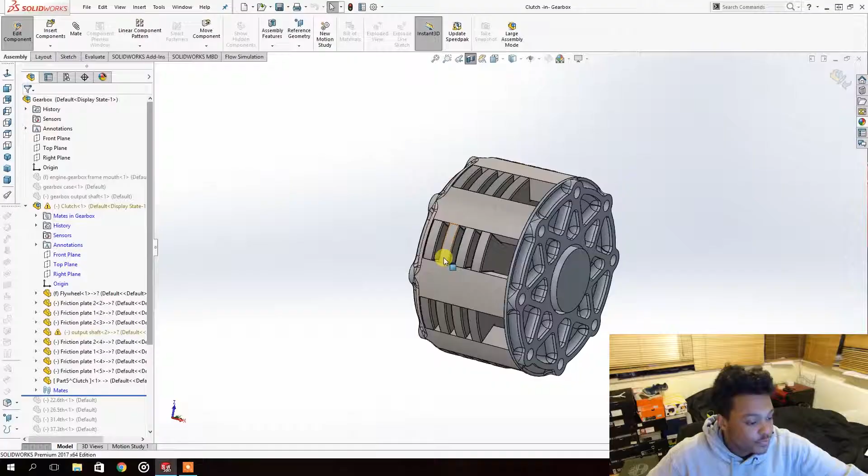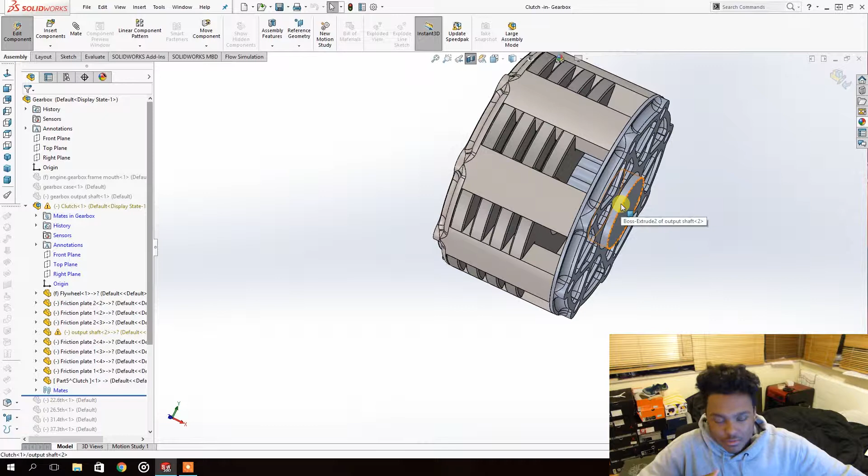The first thing the engine will be connected to for the gearbox will be the clutch. This may look like a double clutch, but this is a single multi-plate clutch. Single and multi are two opposite words, so that might sound strange, but it is a single clutch, there is just one flywheel attached to one output shaft, so only one output shaft. But there are multiple plates, multiple friction plates between the actual flywheel and the actual output shaft.

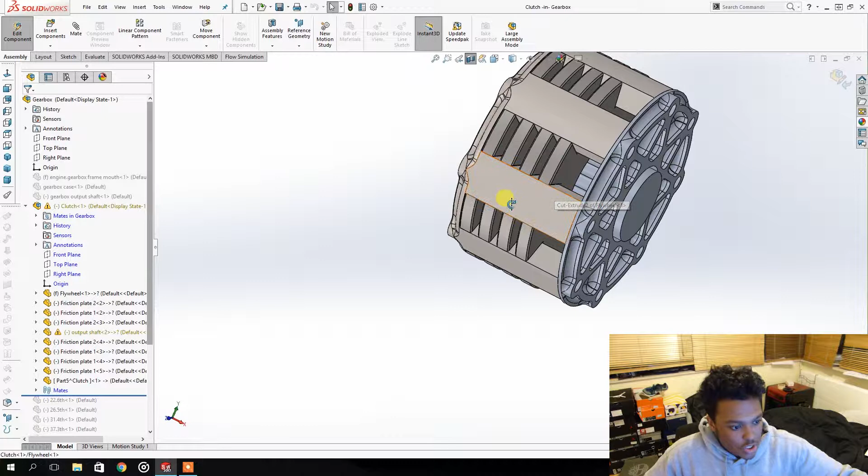The force is divided between those multiple plates to have a similar surface area, because this is only, I believe, 18 centimeters big. This is a very small clutch, so to still have this surface area you need to provide enough pressure between output shaft and engine flywheel to have a single drive line, instead of it slipping constantly, so you have to use a bunch of plates.

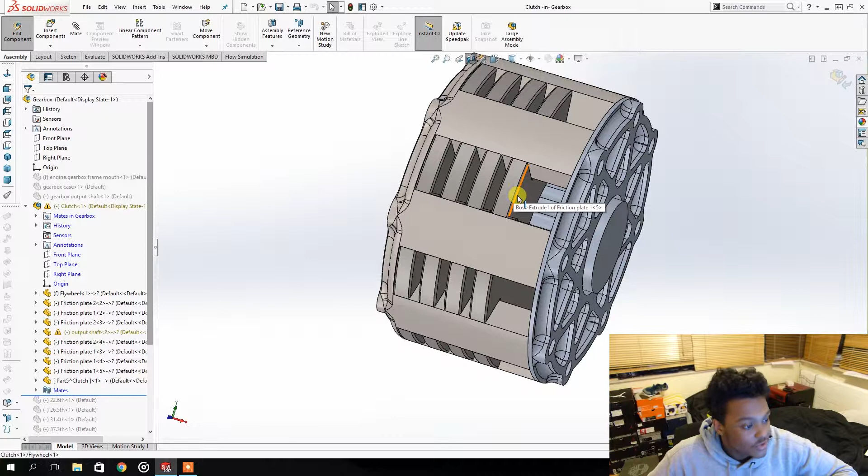So the way it works is there will be some sort of a pressure plate here. I haven't made that yet, and I still need to figure out how I will operate that, probably electronically, because I won't have a clutch pedal in the car or whatever, so that is something I still need to work out. But beside that, the way it works is pretty simple actually.

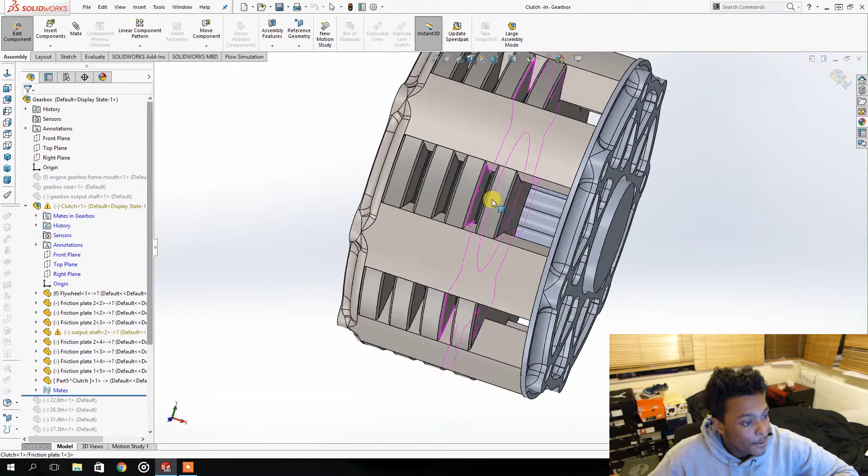If we take a section view like so, this will be bolted directly to the flywheel, directly to the crankshaft of the engine. So this will be spinning at a pretty high RPM, and also with a lot of horsepower connected to it, so a lot of force and torque and everything.

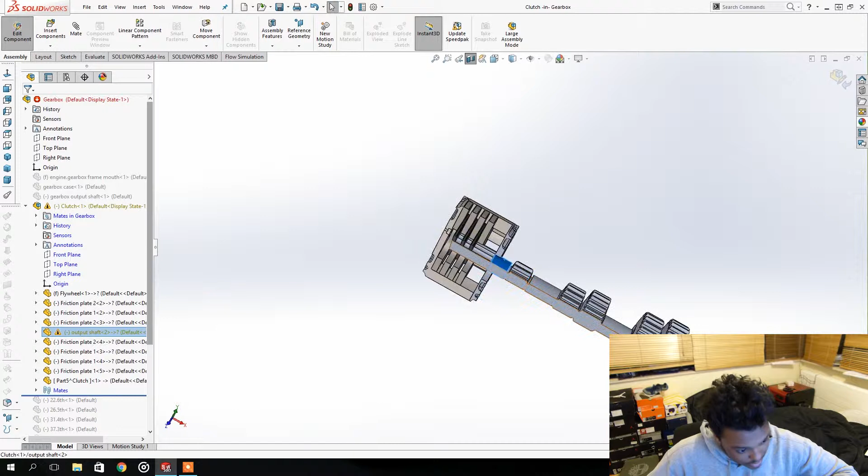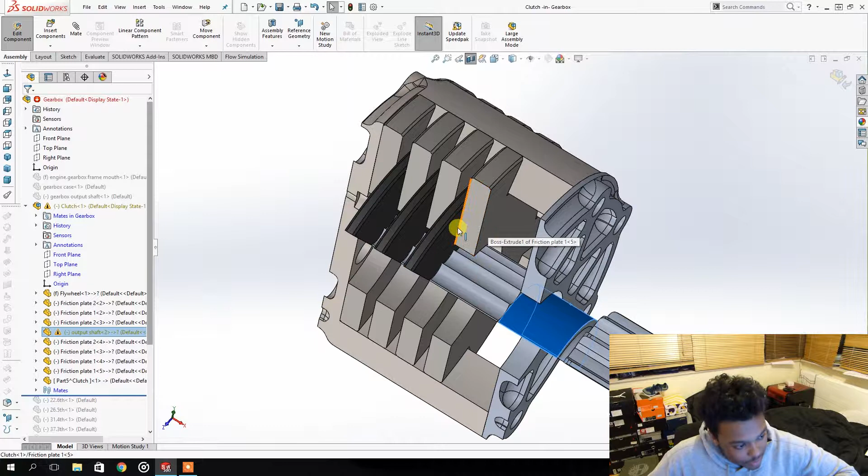This will be connected through the gearbox, and as you can see, the multiple gears, and also the differential, and eventually the wheel attached to the road. The way to transmit the rotational force of the engine to the wheels is through this clutch and through friction. This friction is created by applying a lot of pressure on this plate, and this plate will stick to this plate, and that will run through the whole system.

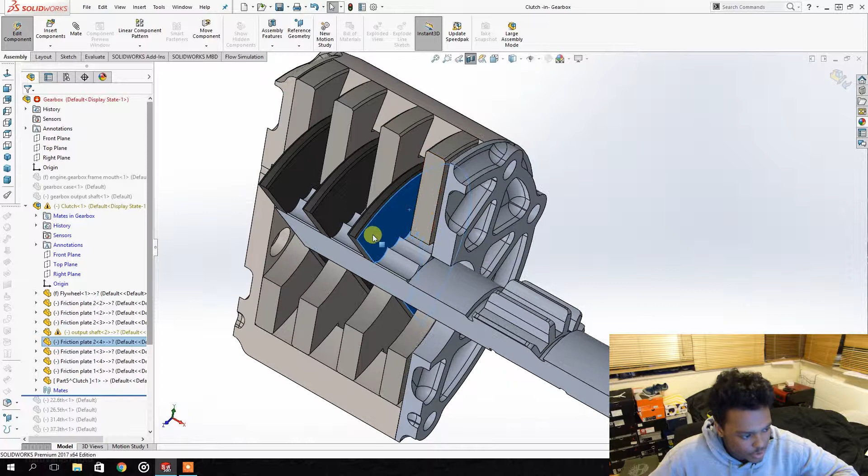Once you disengage the clutch when you're standing still, you can pull it back, and you will see that there won't be any contact between this friction plate and this one right here. These will be made out of different materials, some sort of carbon or steel, or just different fire retardant materials. This will be free to rotate, because it's not in contact with anything, so there won't be any friction created. So the flywheel will be able to rotate individually from the output shaft.

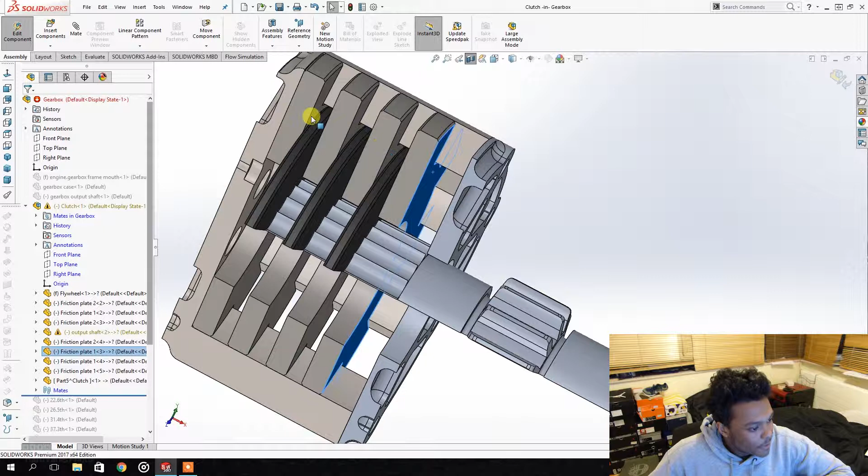As soon as you engage the clutch, you want to drive off the power of the engine, and you will need that rotational power. You can engage the clutch, apply a lot of pressure to this plate right here, and this will press down onto the rest of them, in this version, like so. With all of this pressure, this will have to move as a single unit.

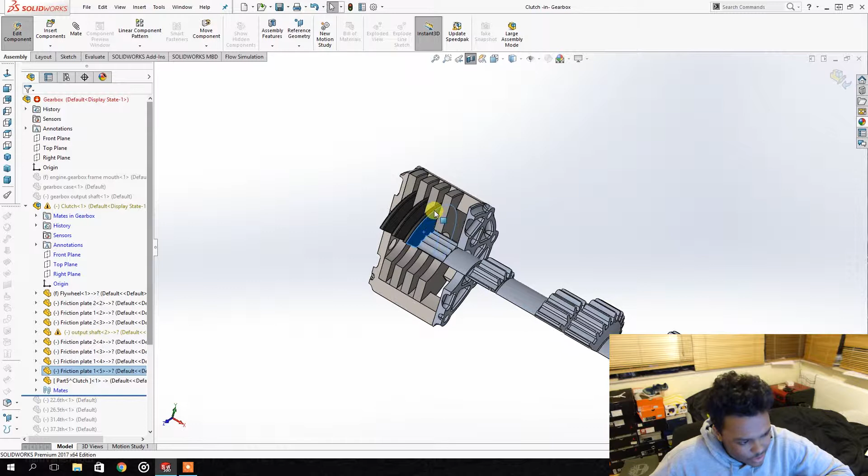Right now SolidWorks doesn't really know friction, so I will still be able to rotate it. But in the real world, all of that pressure and friction will make sure that it is moving as a single unit, and every single RPM from the engine will be directly translated into a single RPM from this output shaft right here. So that is basically the whole purpose of this clutch.

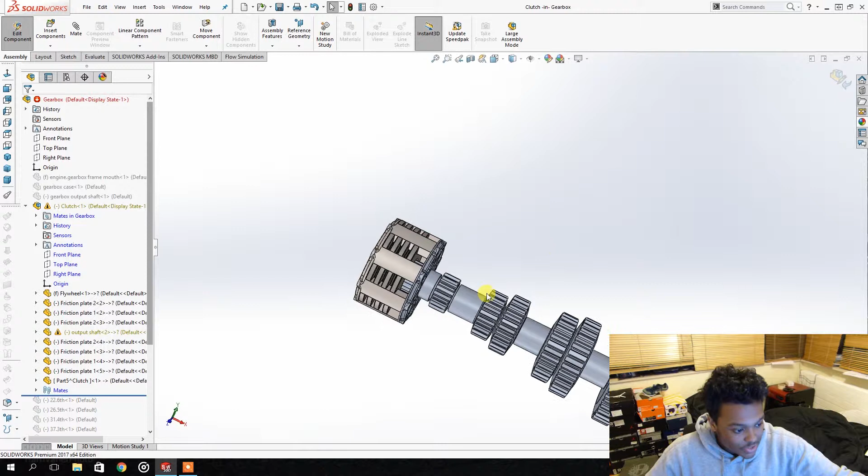Again, this will probably be a wet clutch, so this whole box will just be full of fluids and everything. This whole output shaft has 6 gears, and as you can see, there's a very small one right here, so that will be first gear, second gear, third, fourth, fifth, and of course sixth.

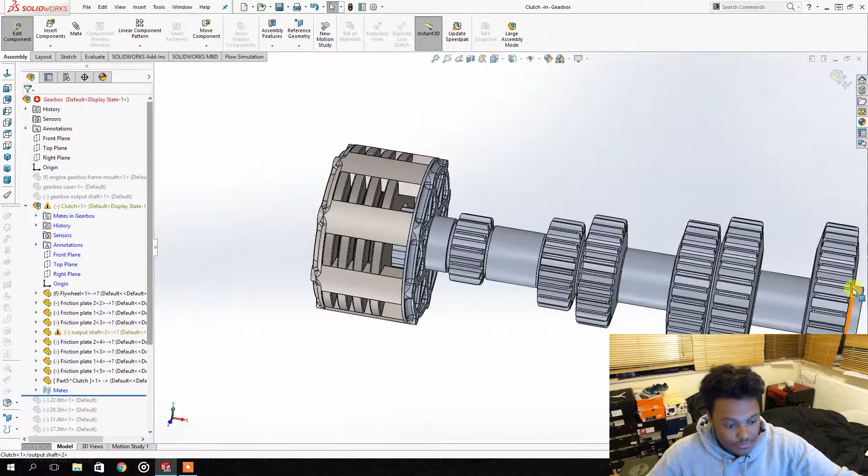One thing that might surprise you is there won't be a reverse gear on this car, and the reason why I will explain later on.

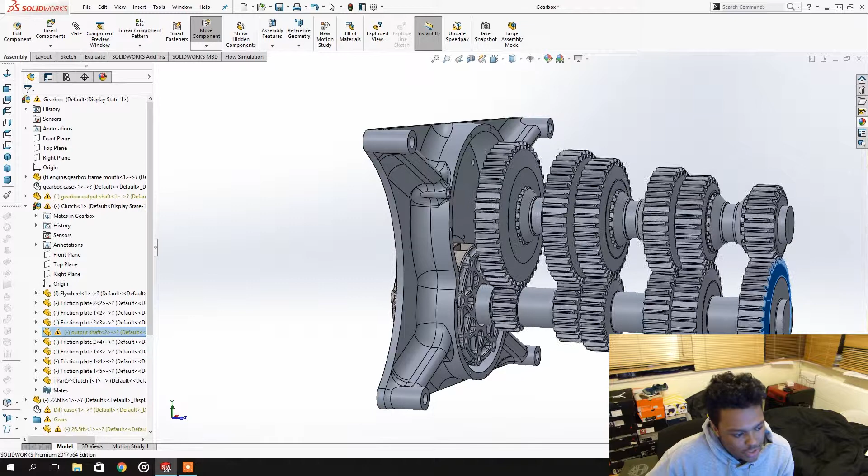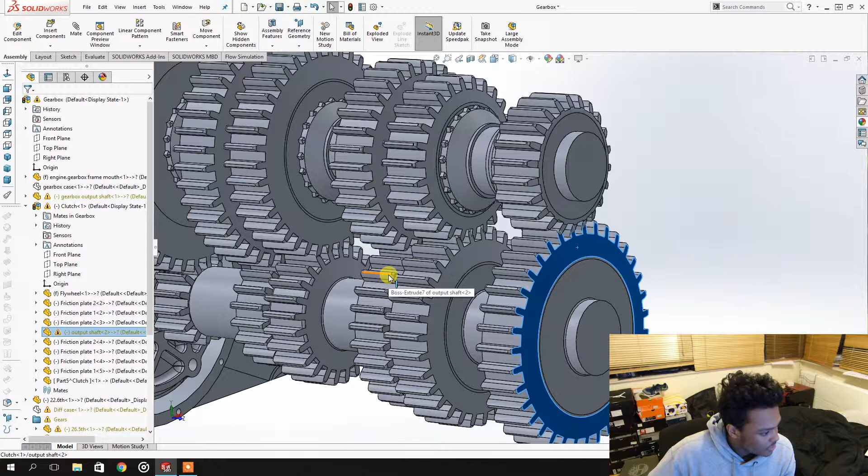So as you can see right now, we have all of the gears lined up against the output shaft with the corresponding gears on that. So when I start to turn this, let's say the engine is turning and clutch is engaged, but no gears are selected at this point. You can see that they all have been lined up, and they're kind of moving. Even though this isn't really how it should be, it is rotating with the ratio, differentials and everything, so that it's going good, even though the teeth aren't lining up in multiple places. I should really redo that just to make it look good, but for now the purpose is clearly shown.

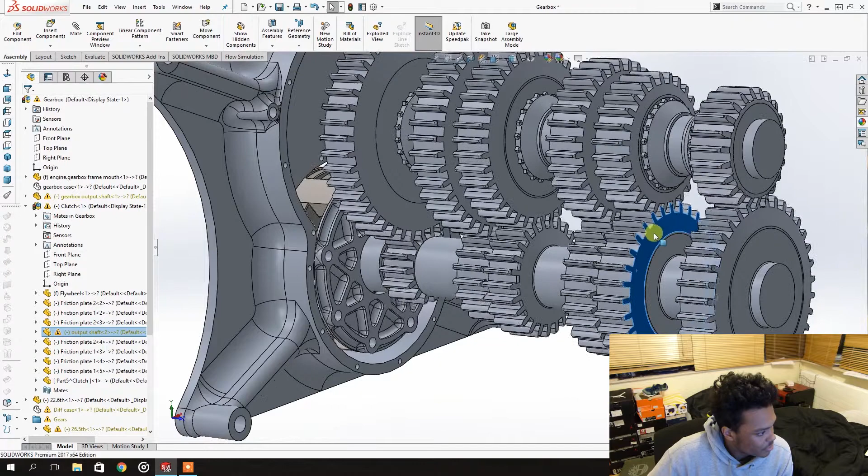But if you can see what I'm doing right here, I can just turn this wheel, the 6th gear right here, and you can see that one single rotation from the 6th gear will cause the output gear, the smaller gear on the 6th gear, to rotate way more rotations. So this is what you call an overdrive gear. One rotation from this gear might be even 2 rotations from this gear. I don't really remember the ratios that I used, but it's an overdrive.

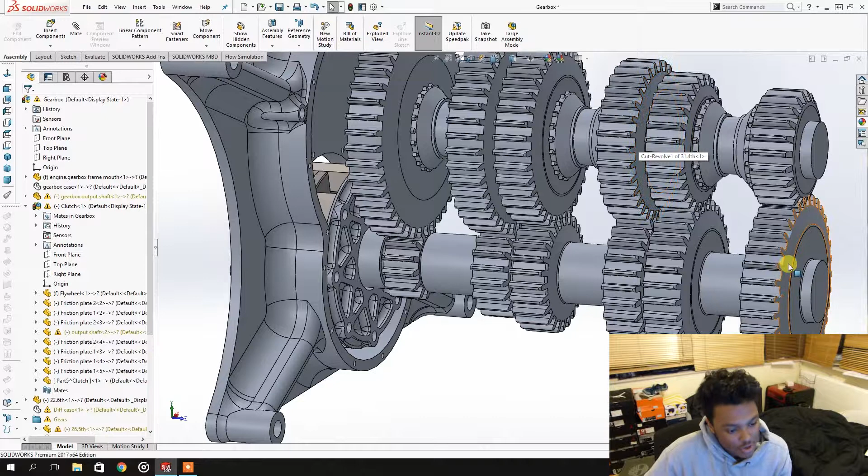And the same goes for the 5th gear, so you can see that one rotation will translate into multiple rotations. I think it's 1.5 something. So 5th and 6th are both overdrive gears, and 4th is not overdrive, it's just a regular gear. But this one will reduce rotation, so one rotation from the output shaft will be like, let's say, 0.9 rotations on the input shaft.

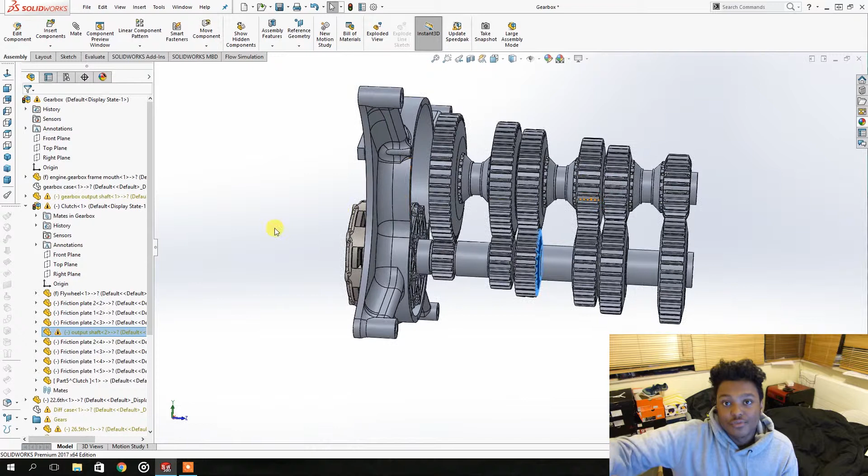And the same goes for 3rd gear, but then the ratio will be even larger, and that's basically how gear ratios work. A single rotation from the input shaft causes the output shaft to rotate more or less depending on what gear it is. On a lower gear, it will rotate less, so that rotational energy will be transmitted into torque instead of horsepower. On a higher gear, it will be the other way around, so the rotational energy will be transmitted as horsepower instead of torque, so you can reach for top speed. So that is basically what a gearbox does, to give you the power when you need it, where you need it.

So that is basically what these gears are doing. And if we take the next step, that will be the synchronizers.

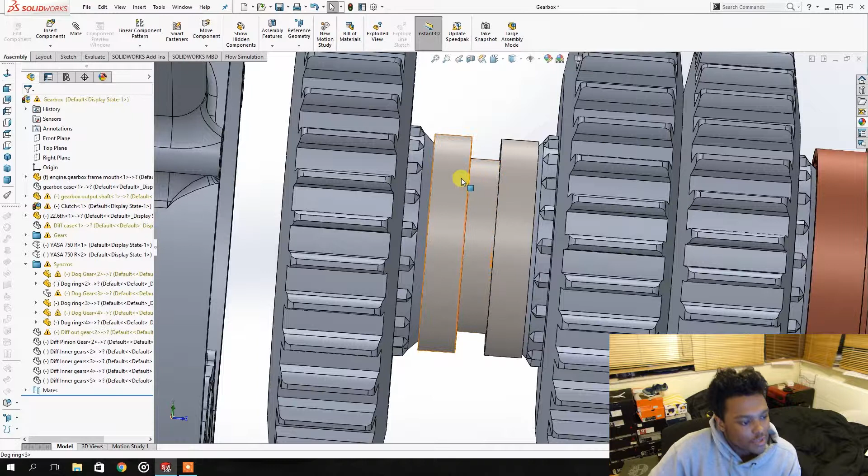What the synchronizer is doing is pretty simple actually. There will be a dog gear - I don't know if that's the right word for this part, my bad - but there's this slider right here. So this slider, if I again make a section view out of this, it'll make it a little bit easier to see.

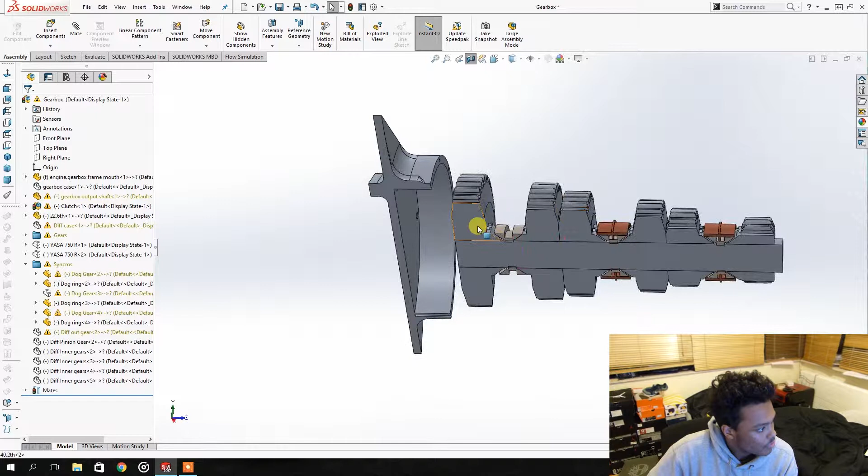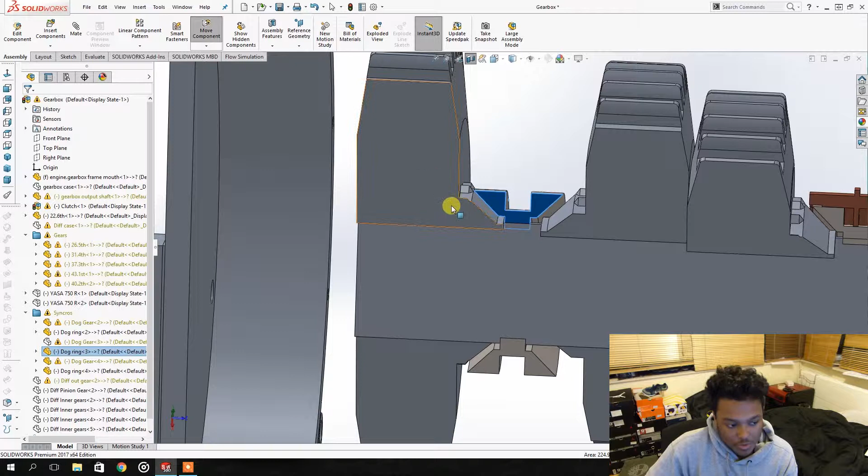By the way, something I didn't mention, these gears are not rotating with the output shaft right here. They are detached from the output shaft, so they're just spinning on ball bearings. And this slider right here will be spinning with the output shaft, so this will always be in contact with the output shaft. So as soon as the slider comes in contact with a gear, let's say 1st gear, the friction between these two will kind of cause this gear to spin at the same RPM as the output shaft, so that will trigger the wheels to start spinning.

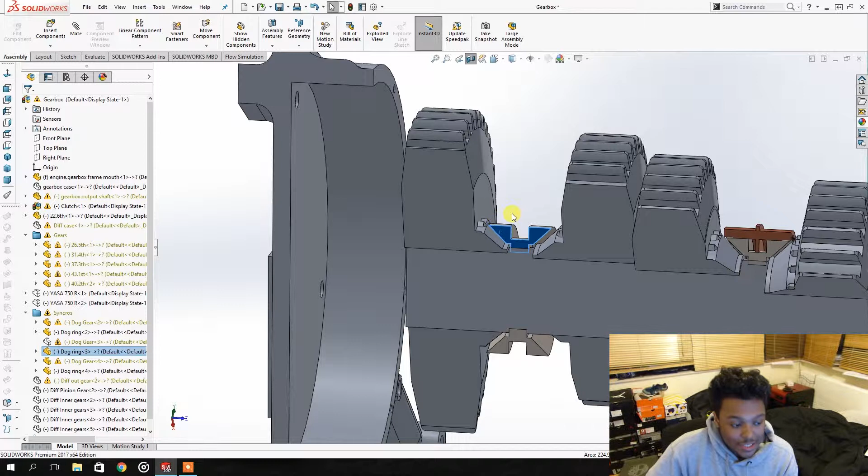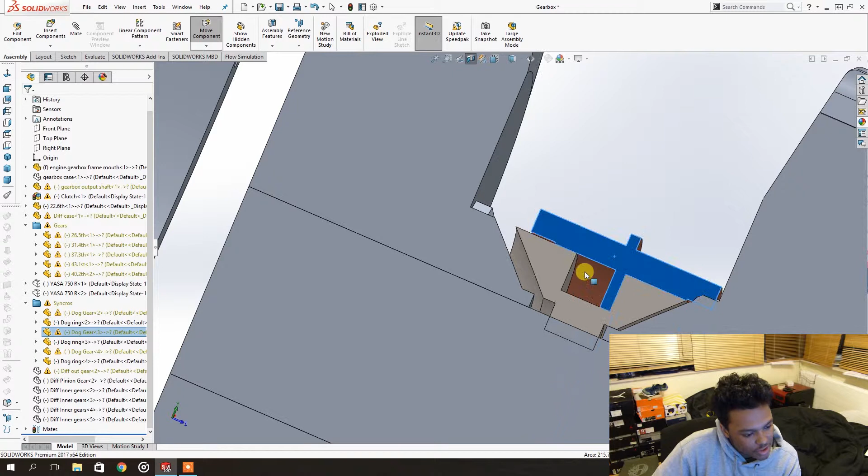And that is not enough though to get it really locked in place, because the pressure on it is not hard enough to kind of get it locked in place, so it otherwise will tend to slip. So what we do is we add a dog gear or something like that - I really don't remember what it's called. So what this slider above it is actually doing, between this wall right here and this wall right here there will be a spring, and as soon as you try to select 1st gear, the selector fork will be attached to this ring right here, and as soon as you push it, it will push this one into this wall right here.

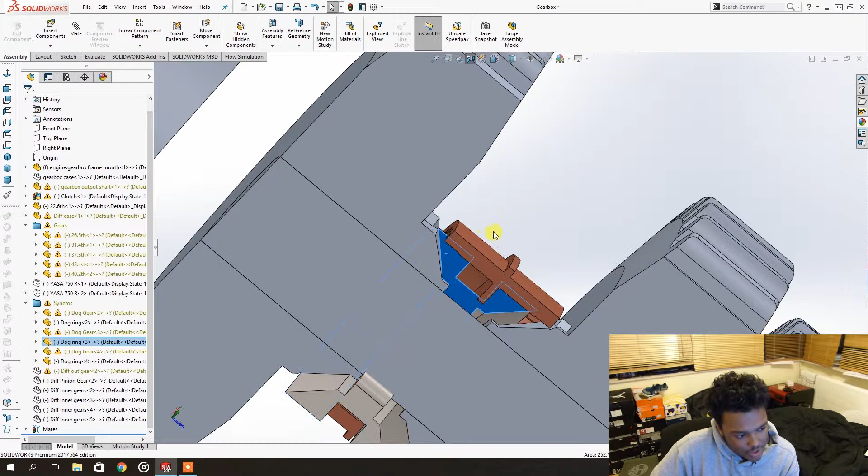So the friction that will be applied will cause this gear to spin at the same speed as this output shaft, and that will allow this gear to slide right into place with these teeth that correspond with these teeth right here. So that is what you call synchromesh.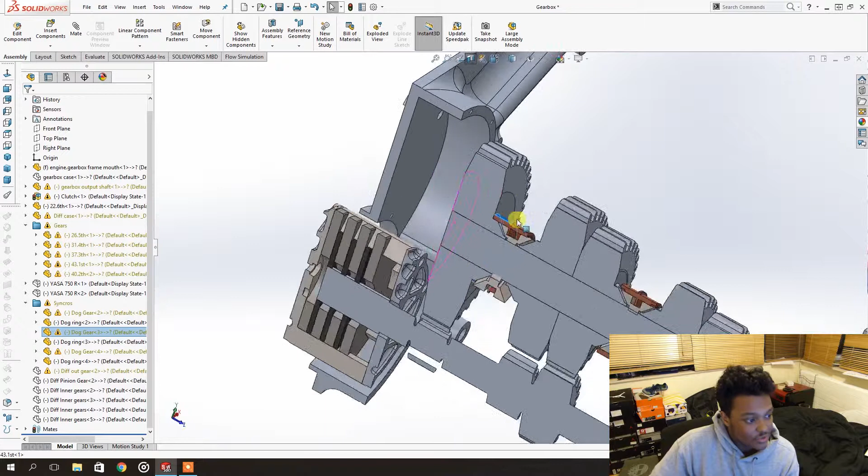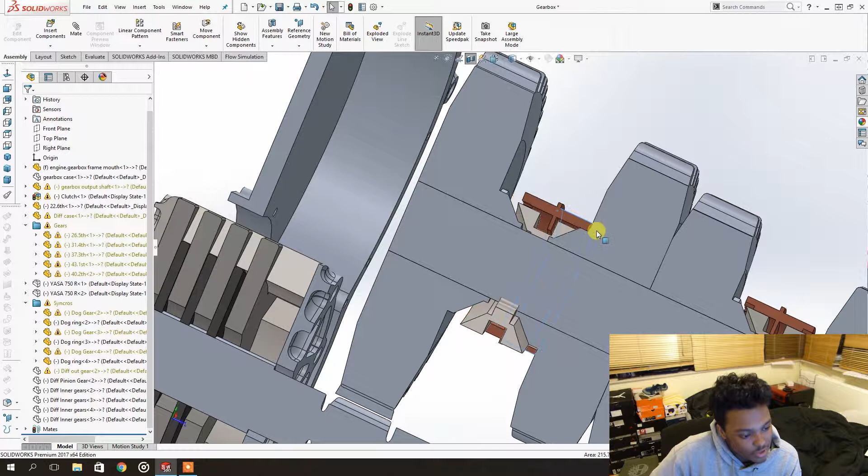As soon as everything is lined up and all of these are detached, this gear is selected and the output shaft will spin at the same speed as the 1st gear. And if you're trying to select 2nd gear, this gear selector will be slid back into place, and it will push this one forward, and then this one will be able to select this gear.

I will put a link in the description for a video that explains synchronizing a little bit better than I do. So that is for another thing, but those are the gear synchronizers.

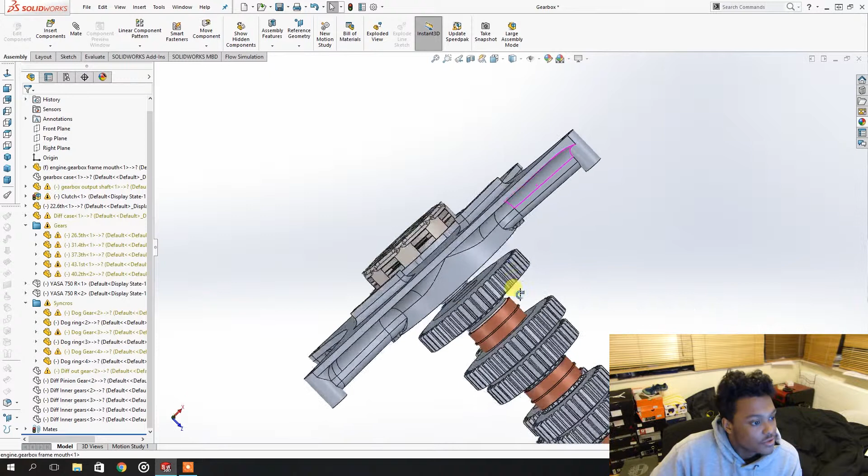So as soon as all of that was run correctly, we are now up to the differential. As soon as we have everything done, let's say flywheels rotating, that rotation is being transmitted through this gearbox with these synchromesh gears and everything to the output shaft, and this output shaft is now starting to turn the differential.

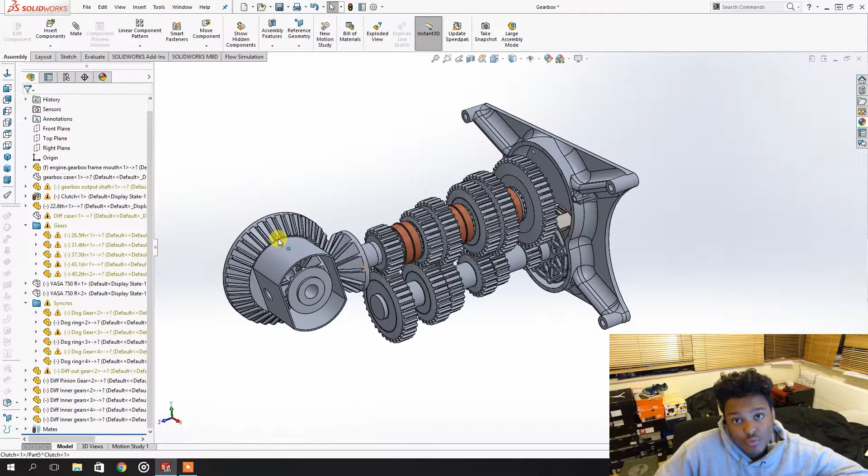The job of the differential is to have an option to let the driven wheels rotate at different speeds, because when you're in a turn, let's say this would be the car, this would be the inside tire, this would be the outside tire, and this will be the point of rotation, the corner that it's making.

As you can see, that outside tire has to travel a way larger distance than this inside tire is. So this outside tire would be spinning a lot more, turning a lot more circles than the inside tire would.

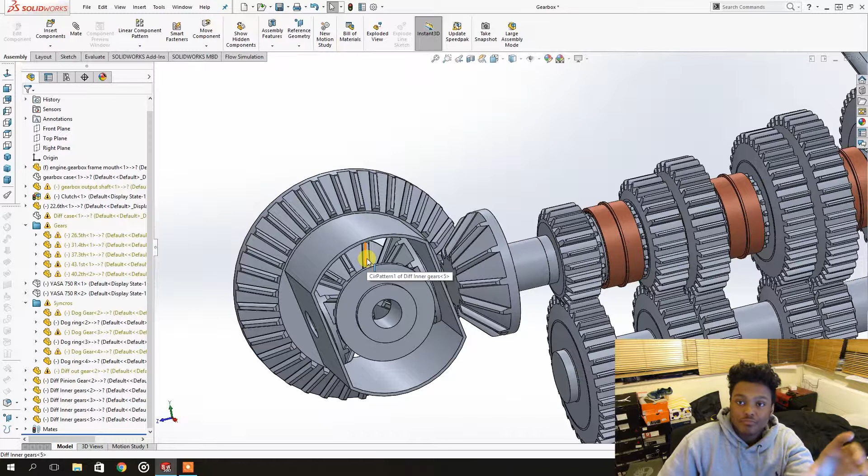So if the engine would just be attached to a gear at a 90-degree angle that would always spin at the same speed, then this tire will slip a lot because it has to turn way more circles than is actually needed if they always had the same amount of rotations. So this device allows you to create a mechanism so the tires never spin too many circles.

So every single time this rotates, you can see this will be symbolized with the wheel. This will be attached to the actual tire.

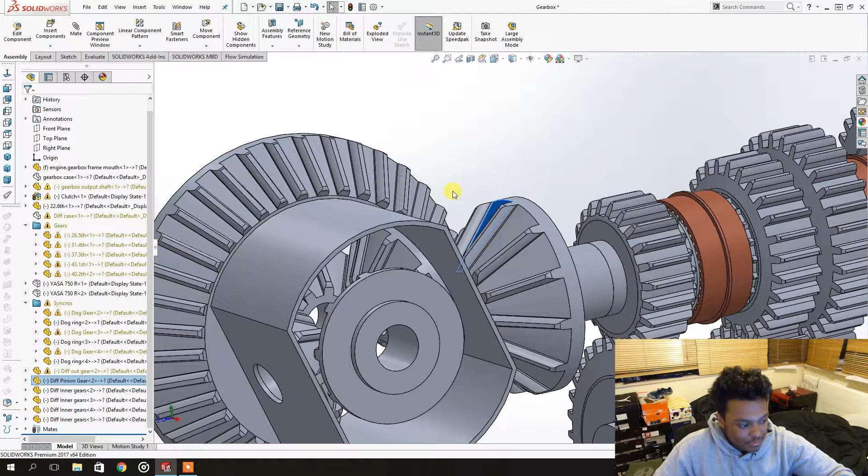So you can see that this right now is standing still and this one is turning, and right now it's the other way around. But you can also see that when this one is turning, it's turning more circles than this outer wheel, because now this one is standing still. So if everything would be locked in place, they would all be spinning at the same speed.

But this just allows you to have differences in rotation for each tire. And also, everything in nature always chooses the path of least resistance.

So if this wheel would be on ice and it wouldn't deliver the system with any resistance whatsoever, it would just allow the wheel to turn, and all the power would be directed to that wheel. That wouldn't be beneficial at all, because all your horsepower would go to a place where you don't have traction. That would just cause the tire to spin even more, and it will probably even result in you losing control of the car, so that won't be safe.

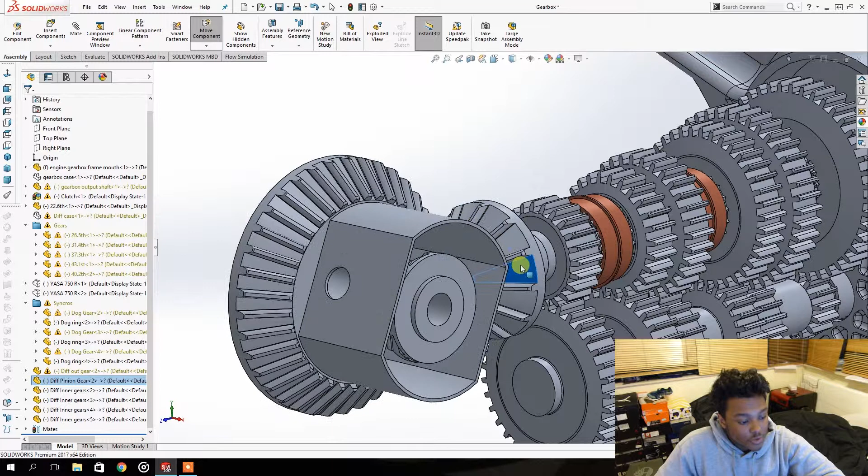So the way to alter that is to have a locking differential. This is an open differential, and a locking differential helps the car send power to both of the wheels in a situation where one wheel has more grip than the other.

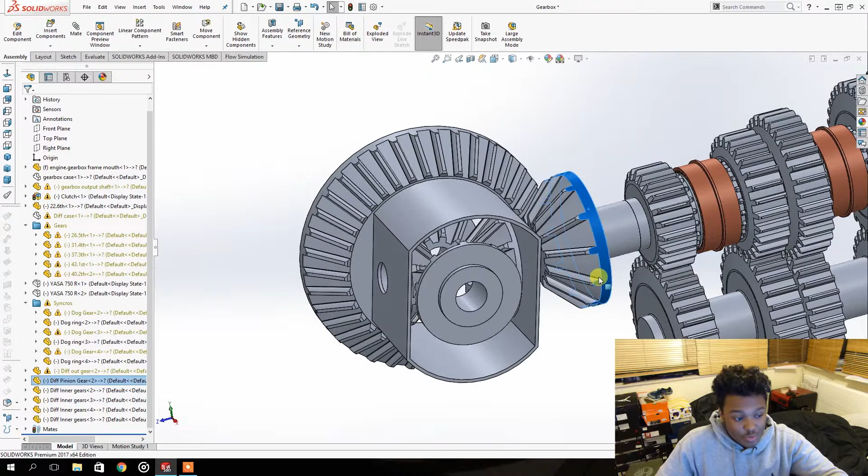In this open differential situation, you kind of don't have that possibility, but the solution I came up with is to have these two great big electric motors. Power always chooses the path of least resistance.

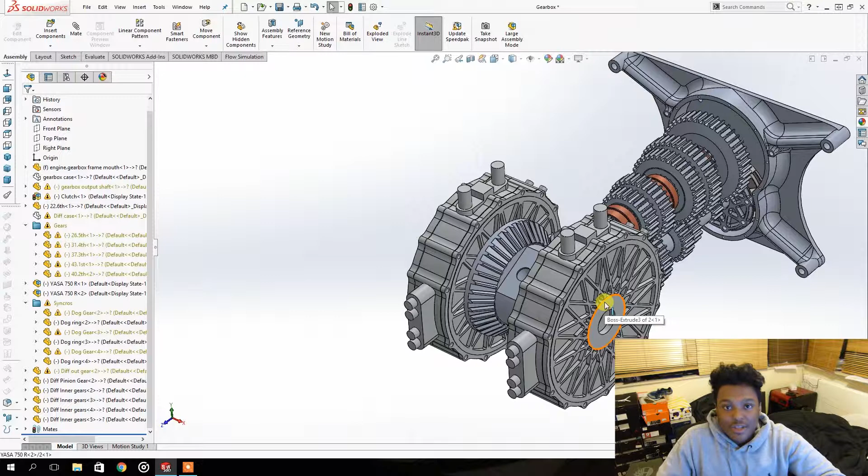Extra power isn't just least resistance, it is extra power. So if I decide to put more horsepower on this electric motor than on this one, the engine power will also be redirected to that side. So you can choose torque vectoring, choosing which wheel should have more grip at what time. In a corner, you can have the outside wheel put more power down. So that's kind of a problem solver.

The next thing I wanted to discuss is the motors I actually used, these Yasa 750Rs, and 750 stands for 750 Newton meters of torque. Was it Newton meters or pound foot? I don't remember, I'll look it up. But the car will only probably weigh around 700 kilos, and for a single 750 Newton meter electric motor to be there is kind of overkill.

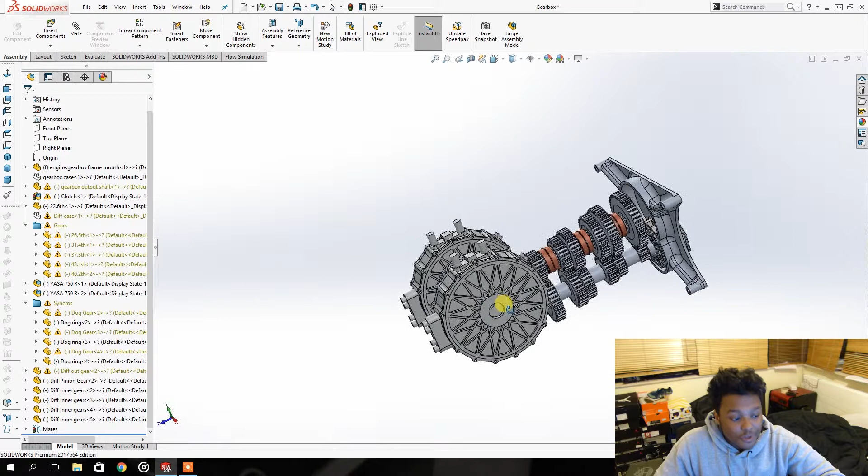So what I was thinking is it would be cool to have like real PlayStation style a button on your steering wheel where for 5 seconds you have boost, real extra capabilities of accelerating when you feel you have full grip. That's kind of what I want this car to be, because I grew up in an era of video games, so I thought it would be cool to have the possibility to just push a button and have stupid power to propel you along the road.

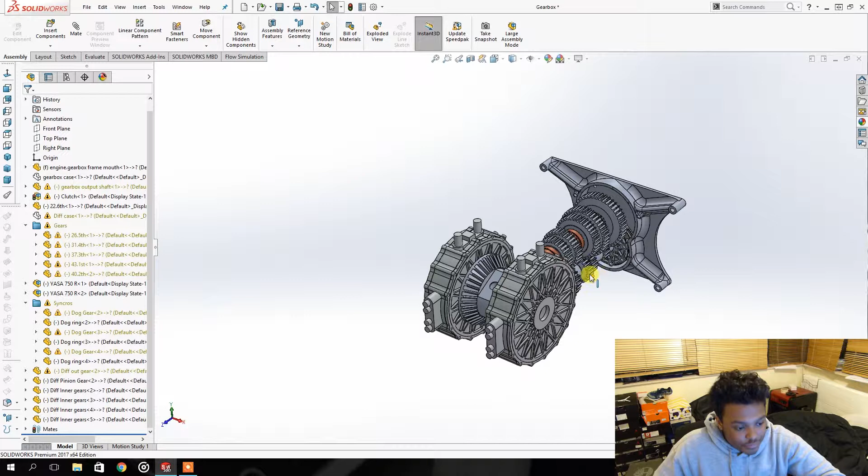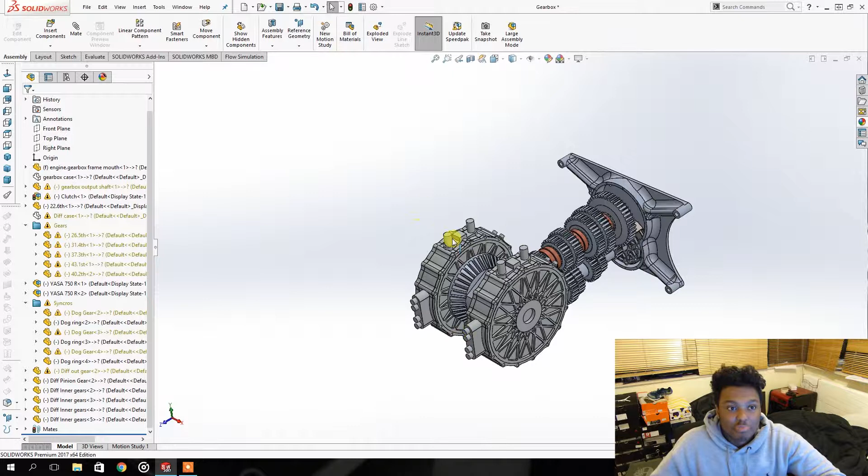With the motor attached, the V6 I already built, I think it should be able to push like 400 horsepower just with that motor. That's a 2-liter V6 with a lot of other technologies attached to it, and then with these motors attached again, probably ending up at somewhere around 800, but when you push the button it will be more like 1500 when you need that extra power.

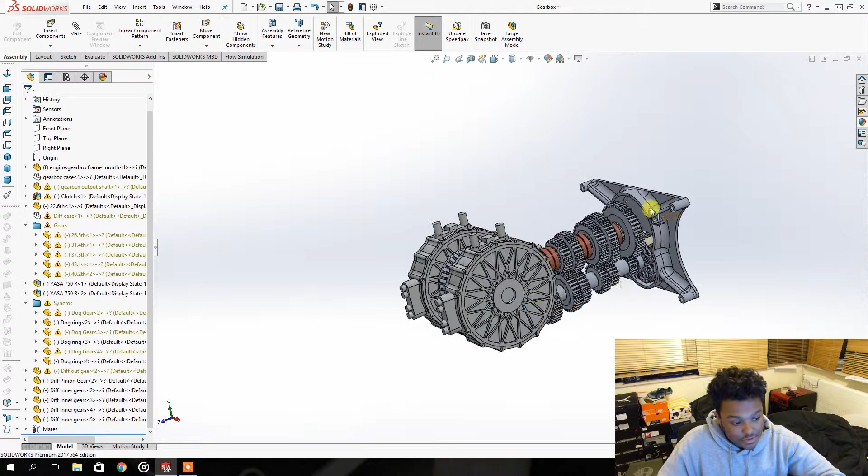These motors are 37 kilograms a piece, so you'll have something like 74 kilograms of extra weight just from the motors, but you also need a battery, inverters, extra cooling, wiring, and all of that. So there will be a significant weight penalty, and it'll also be easy to just take them off and not use it. But I thought it would be a fun element to just have a button on your steering wheel and really accelerate harder, get a kick in your ass trying to accelerate harder.

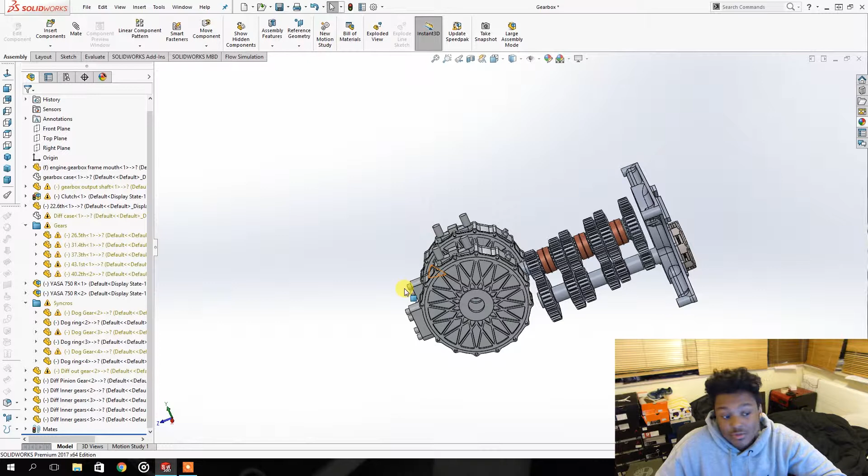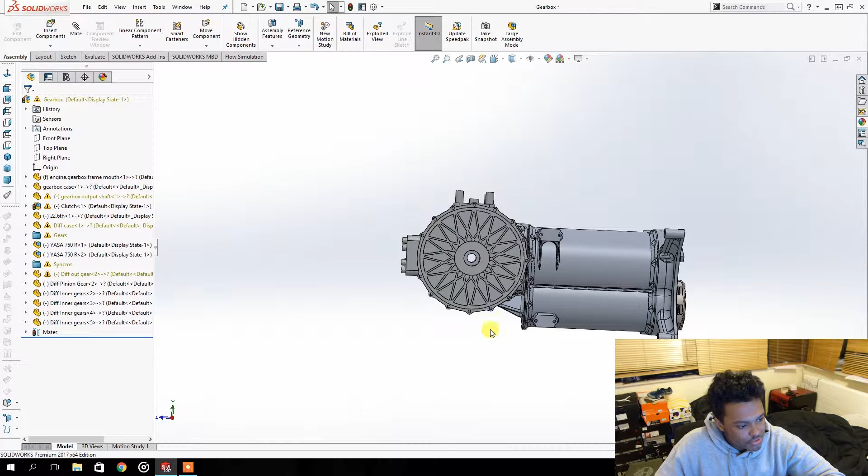So that is basically everything I'm doing. As you can see, this is what the unit will end up looking like. This will be the attachment point for the suspension, and I need to make more of them, one right here and one right here, and I'll figure out how to do that with some rear frame mounts or whatever, or just maybe extend this. I think that will be the best way to go.